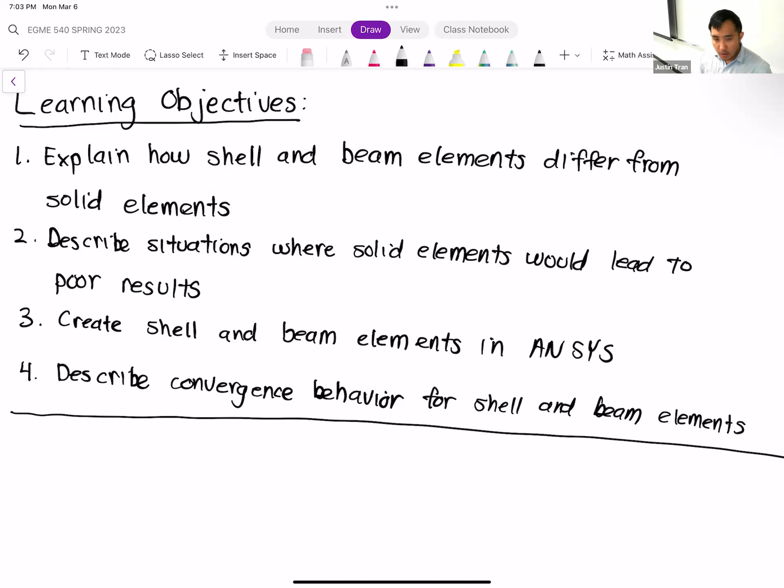Okay, let's go ahead and get started. The topic for today is shell and beam elements.

We started talking about this for the last 20 minutes of class last time, but let's go ahead and summarize what we talked about. So far, all the element types we've been using, the tetrahedrons and the hexahedrons, I consider these to be what's defined as the solid element types.

What the solid element types were really designed to do is simulate three-dimensional objects. Which sounds very obvious, right? Of course we're simulating 3D objects, so what's the big deal? Why are we introducing new elements if these already work for 3D objects?

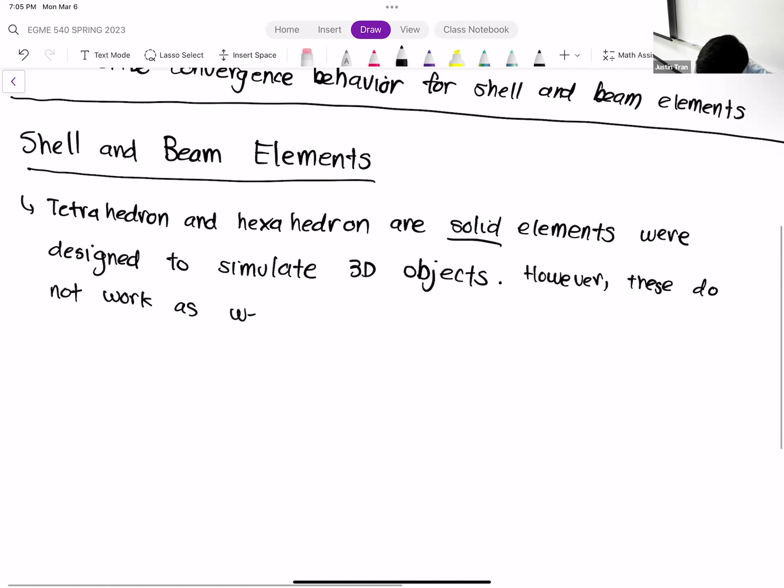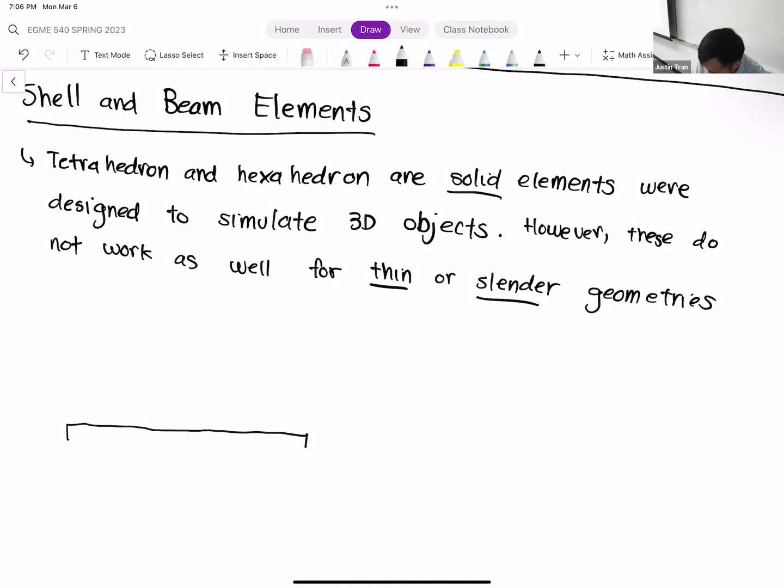So let's say, a thin geometry would look something like this, and the most quintessential example of that would be like a thin plate.

You can see from this image that if we look at 2 of the dimensions - the length of the plate, which we'll call L1, and the width of the plate, which we'll call L2 - and compare that to the thickness of the plate, L3, we have L1 about the same as L2, which is much, much greater than L3.

So we can look at this object and say yes, this is a three-dimensional object, but we have one dimension here that's much, much less than the other ones. Similarly, another common example you'll see is a slender rod.

In this situation we have one dimension, L1. And then I'm going to use two dimensions here - I know it's a cylindrical rod so technically you only need the diameter, but if we look at the length or size of the rod in each of those two directions, L2 and L3, we can use those as comparisons for their lengths.

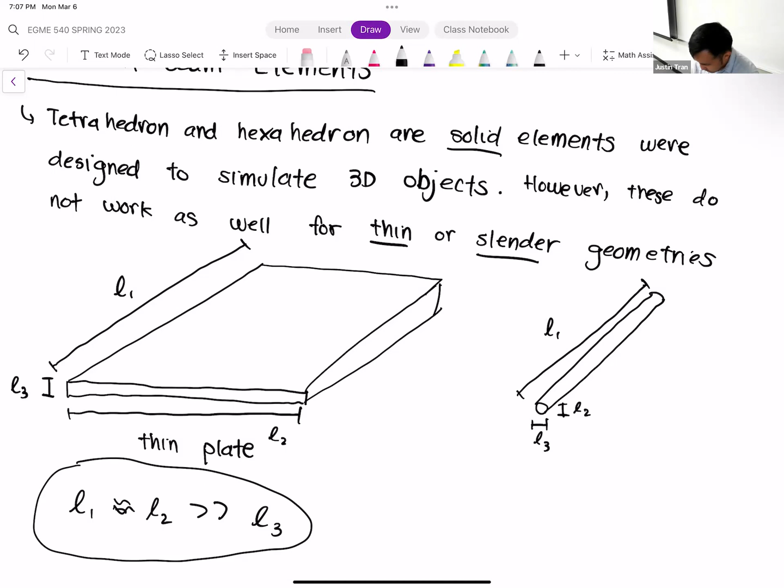So in this situation we have one dimension that's much, much bigger than the other. We have L1, which is much, much bigger than L2, which is about the same as L3.

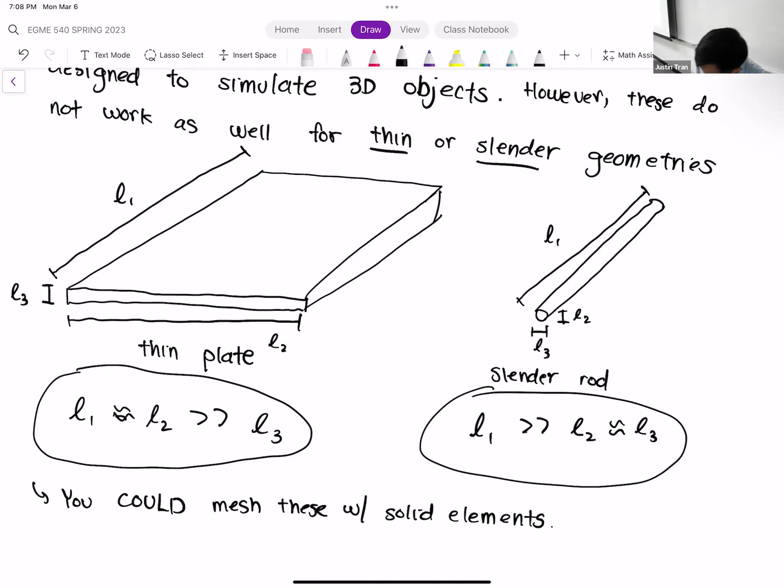Technically speaking, you could mesh these objects with a solid element type - you can use a tetrahedron or a hexahedron. You technically could, ANSYS is not going to stop you. The issue is that it's not going to be efficient, meaning that in order to get a good quality solution, you're going to have to use a lot of solid elements in this kind of small space.

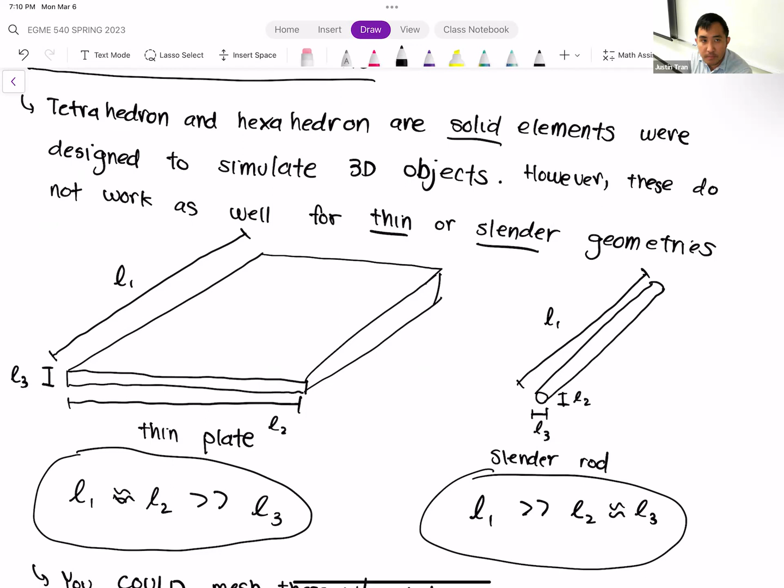So you're going to need - sorry, go ahead Ivan. Sorry for interrupting, you mentioned solid elements, can you briefly explain what you mean by that? Yeah, so solid elements are basically the tetrahedrons and the hexahedrons. I see, thank you, sir.

All right, so we'll dive a bit deeper in terms of why these elements, why the solid elements, are so inefficient. But let's take a step back first.

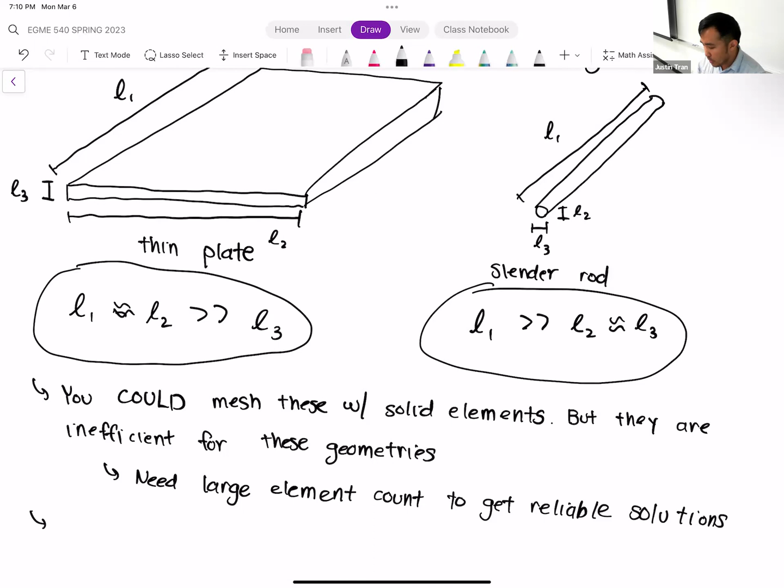The reason you can say the solid elements perform poorly here is that they're kind of ill-suited for these geometries. If you have a very thin plate, you have one dimension that's much, much smaller than the other ones, and same for a slender rod - you have one dimension that's much, much bigger than the others. So you have a mismatch of dimensions, and it would be great if you can use elements that capture that kind of behavior.

It would be great if our elements took advantage of these geometrical features.

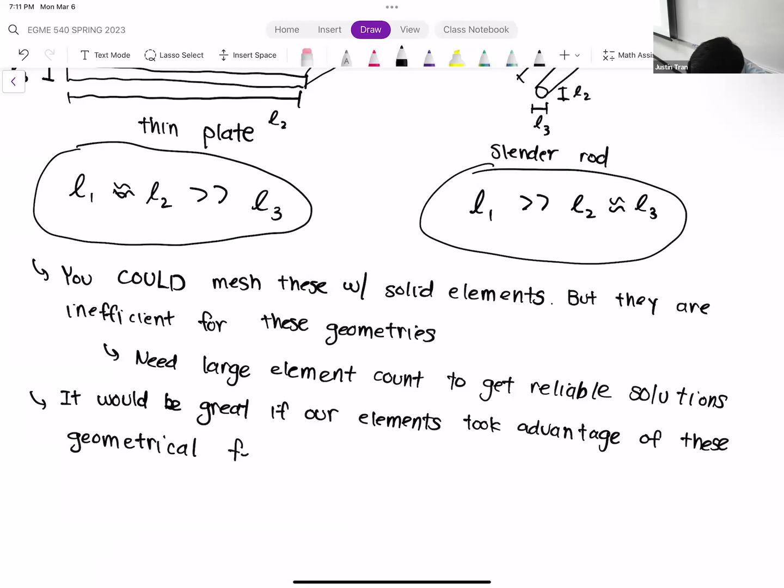And luckily such elements exist, okay? Otherwise I would not bring it up. And so these elements are shell and beam elements.

So today what we'll talk about is, first of all, we'll describe why solid elements are poor in these situations. Then we'll talk about what shell and beam elements do differently to make them work a lot more efficiently in these situations. Any questions on this so far?

Okay, so let's talk about why solid elements perform poorly in these situations. When you have a geometry with a very big disparity in the dimensions, what can happen sometimes is that you can have elements that are just one element through the thickness. That's typically how it's described.

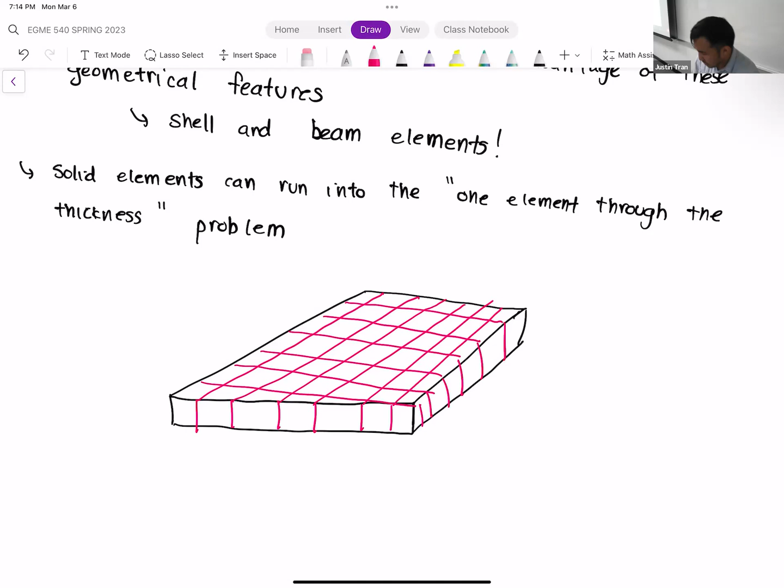When I say that we have this one element through the thickness problem, what I'm referring to is this. If we focus in on this element in particular right here, let's look at all the nodes of that element. All of the nodes on this element are facing the outside, right? So we have all exterior nodes.

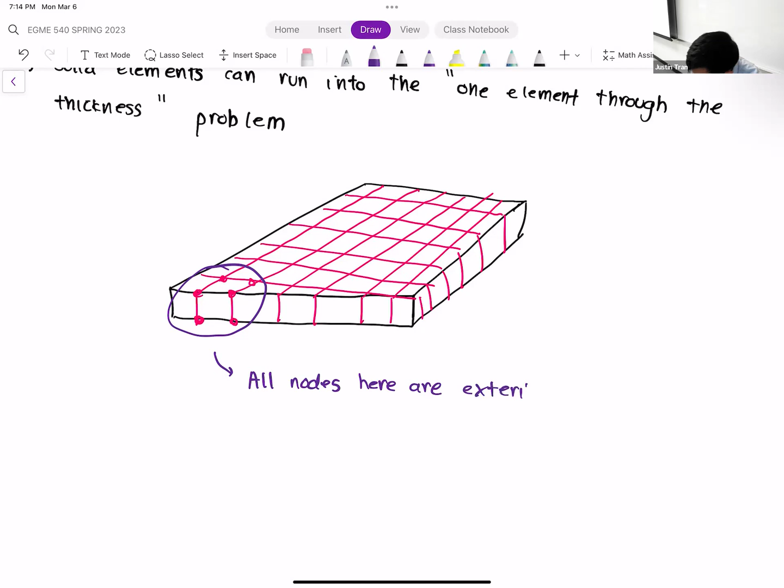That means that when you have an exterior node, their behavior or their solution values is primarily going to be determined by whichever boundary condition is being applied there.

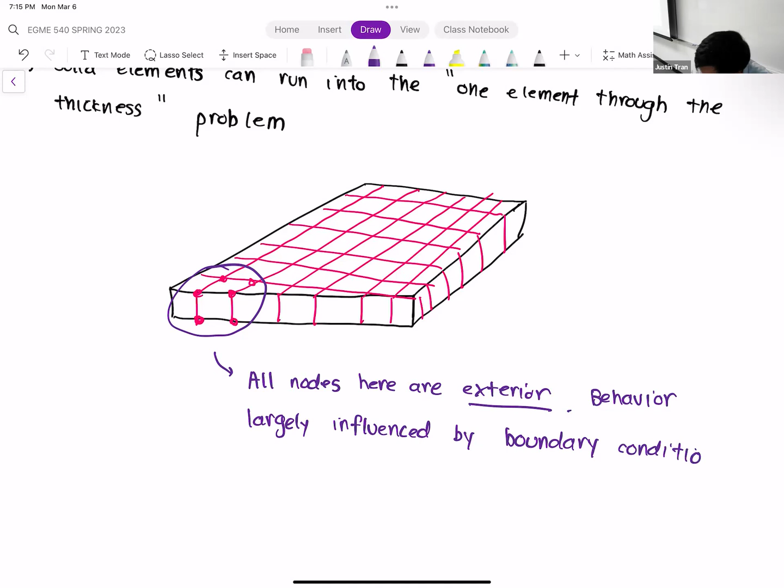Dr. Tran, what happens if there is no boundary condition applied? Will ANSYS give us an error, or will it assume the value of the nearest node?

No, we talked about that before when we talked about boundary conditions. So even if you don't explicitly put a boundary condition on a certain face, ANSYS does apply a default boundary condition there. A lot of times it's called the stress-free boundary condition, which means that there's no load being applied. Mathematically that may seem kind of obvious, but it does have a certain form within the code.

And so it's kind of important in these situations where that stress-free condition may not be what you want. You don't want it to have undue influence on you. Yeah, you need to have the right boundary conditions.

And not even the right boundary conditions - even if you had the perfect boundary conditions in this situation, if you had just one element through the thickness right here, it would not lead to... it'd still be wrong. I see, and that's what you're emphasizing here - the one element in the thickness direction causes errors.

Exactly. Because a lot of times, what we're interested in, especially when you do structural FEA - although the same thing applies if you're doing thermal FEA or fluids FEA - a lot of things that you're interested in are kind of internal quantities. For structural FEA, you're interested in the internal stresses.

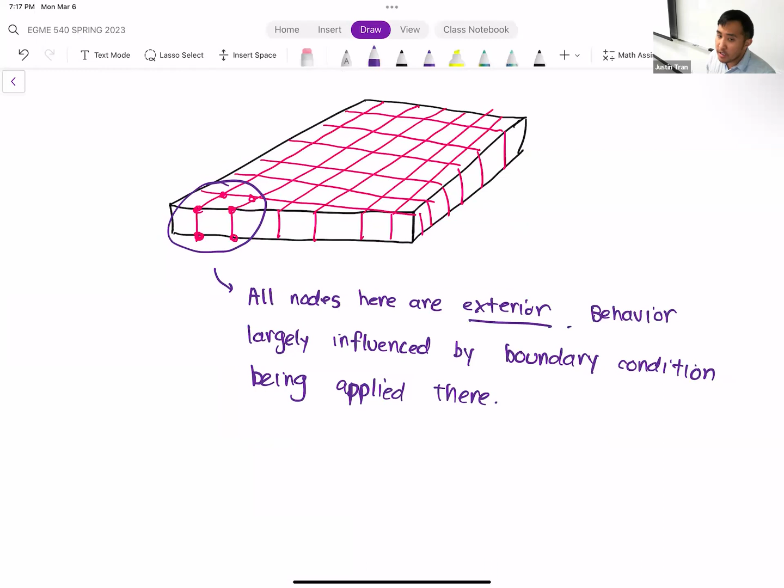So for fluids, you might be interested in like flow rate or the pressure. The thing is, when you're talking about these kind of derived quantities like stress or heat transfer, their value gets a lot less accurate if you don't have interior nodes. Sounds good, sir. Thank you.

And so a good mark of a healthy mesh is one that has a good amount of interior nodes at all points of the geometry. So that's one thing that people look for when they're looking at mesh.

So I was gonna ask, is there a certain minimum number of nodes, a general rule of thumb, like make your 3D dimensions a minimum of 5 nodes or something like that? Is there a general rule, or is it just up to the engineer?

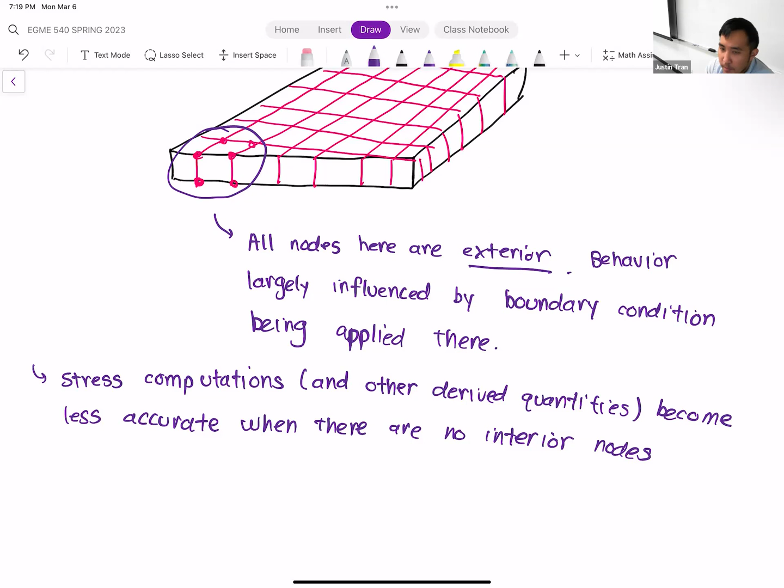There's no magic number. Generally, the more interior nodes you have, the better, because there can be a lot of derived quantities computed out there. Depending on how derived a quantity is, it's going to require more interior nodes. The bare minimum is at least one interior node, which is already much better than none. But the more you have, the more reliable your solution will be. Later in the class you'll learn about a mesh convergence test, where you see how the solution converges with the number of nodes or elements in your mesh. The more interior nodes you have, the easier it is to converge.

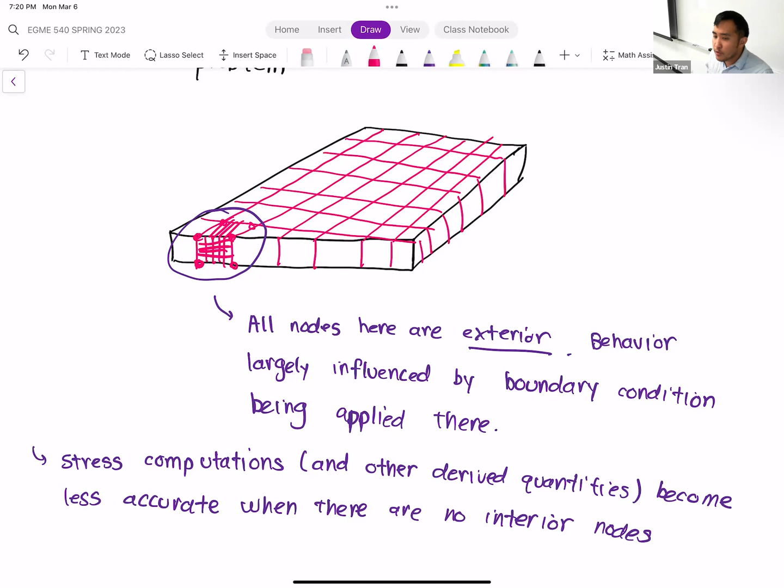So the problem is, one thing you may say is, okay, we want interior nodes, so why don't we just make the elements smaller until we get interior nodes? You can certainly make these elements much, much smaller, and solve your issue by adding more interior nodes. The problem is this is not practical in a lot of situations, because to get a decent amount of interior nodes in a very thin geometry, you'd need a very tiny element size, which drives up the cost of your simulation significantly. This shows you why solid elements may not be suitable for every geometry, especially ones like this.

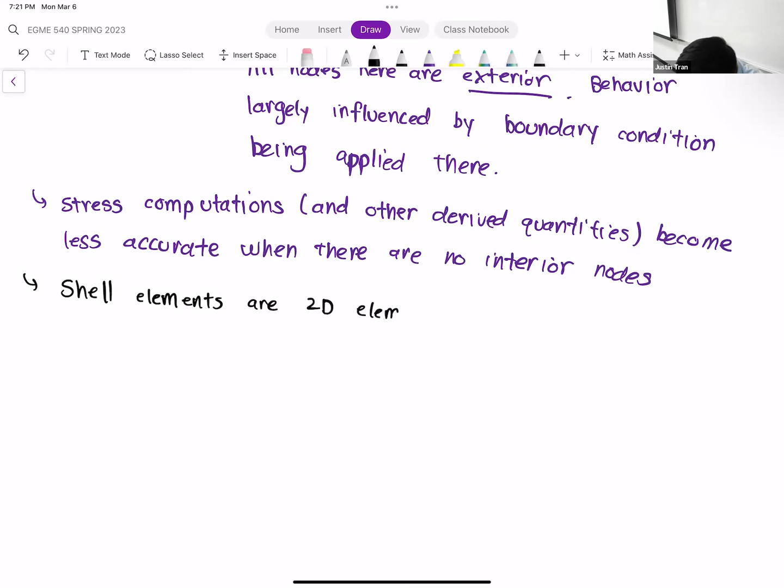That brings us to shell and beam elements. Let's talk about what they do differently. When you first look at them, they don't look like anything special. A shell element is basically just a two-dimensional element. We've gone over 2D elements, which are either triangles or quadrilaterals. Beam elements are just 1D elements. So what is a 1D element, you ask? A 1D element is just a line. You may be thinking, wait a minute, that doesn't sound special, that just sounds like a 2D or 1D simulation. But what makes these special, and the reason we give them a special name, is that they've been augmented with additional terms, and designed to work in 3 dimensions.

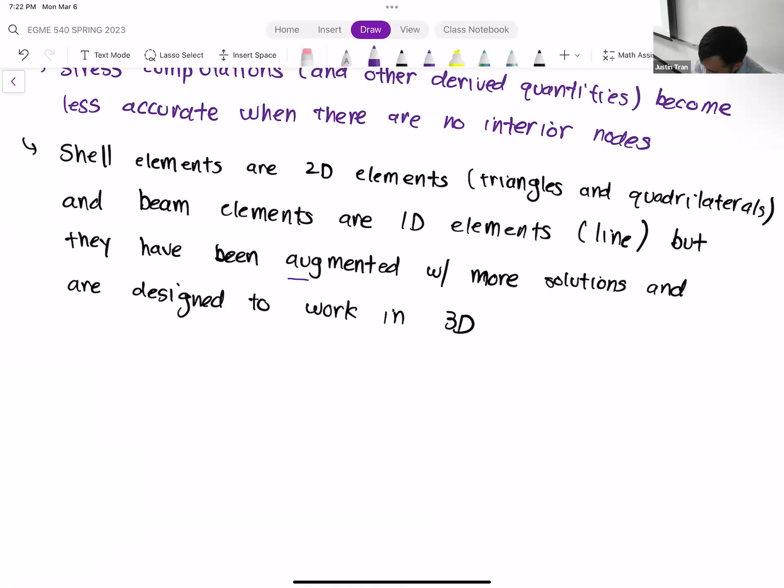Let's go over both of these statements. First, let's talk about the augmentation. Normally, when you have just a regular solid element type, the finite element solution is going to solve what I consider the primary solution values. But when you have a shell and beam element, FEA is actually going to solve for more terms, or more solutions, at your nodes.

So to illustrate this, for solid elements, the first thing that FEA solves are all 3 dimensions of deformation, in X, Y, and Z. Then, from the deformation, the FEA computes things like stress, which are derived from the deformation. That's why we call it a derived quantity.

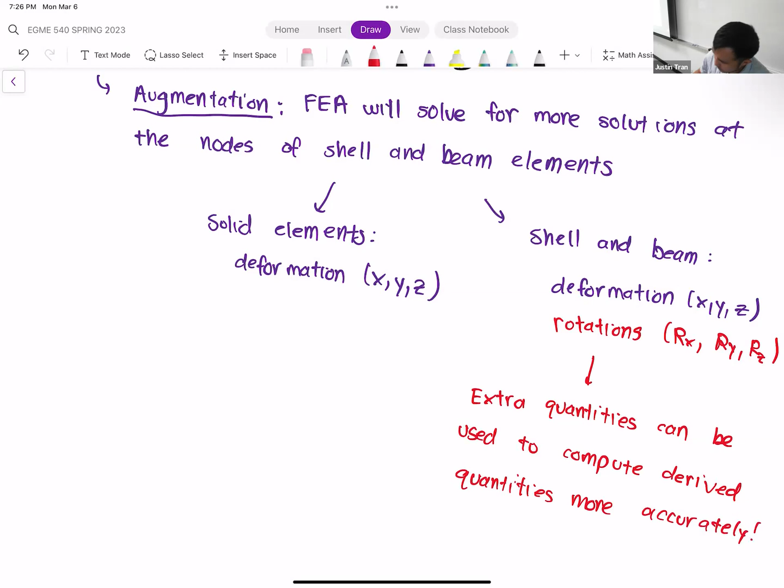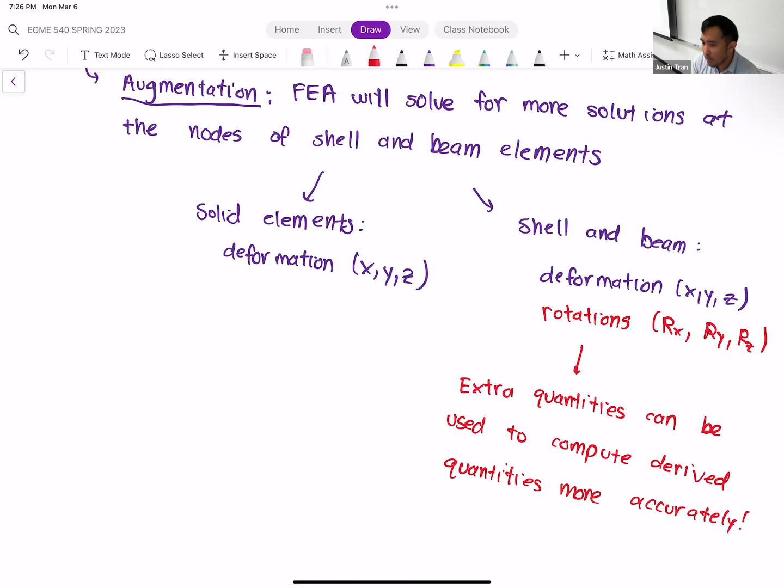Even though visually what you'll see is that when you use a shell element, it'll look like just a thin sheet, okay, something with zero thickness. So you might be saying, wait a minute, you just told me that if you have no interior nodes, that's bad. And if you have a 2D shell, you literally have zero interior nodes. So how could that be better? The reason it's better is because the shell, we compute these extra things, and those extra things can compute things like stresses a lot more accurately.

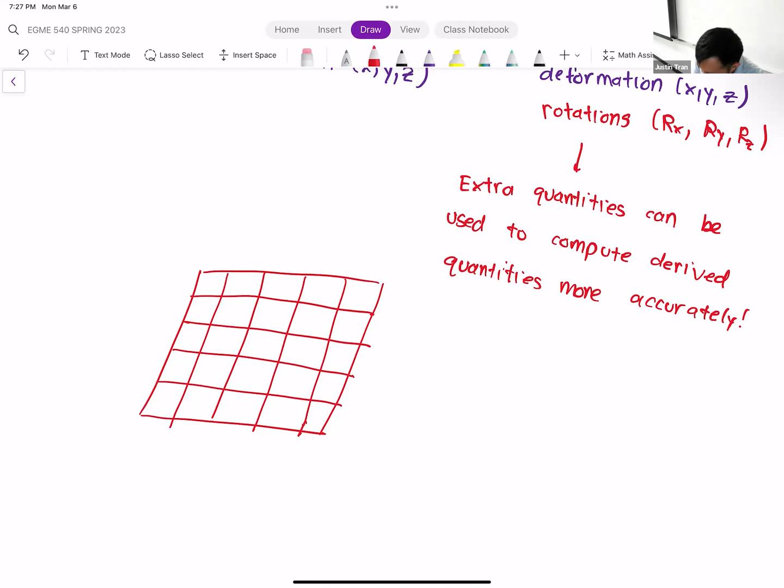And visually it looks something like this. Let's take the same plate, but instead mesh it with shell elements. So a shell representation of that thin sheet from before would look like this, okay? But at each of the nodes, we're computing dx, dy, dz - those would be the deformations - and rx, ry, and rz. In other words, we have more degrees of freedom to play with and more degrees of freedom to solve, and that gives us more accurate results for all the other derived quantities.

We're not going to get into the mathematics behind it. The reason why we have this augmentation is that for the shell elements, we're essentially solving a different equation. And because we're solving that different equation, we're able to obtain these extra results.

All right, any questions on this? Yeah. Wait a second, rotation? Yeah.

What is it? So rotation is basically a change in the orientation, or it computes the change. So let's say you have kind of a square like this. At each of these nodes, you can compute its displacement. Displacement is simply just where the node started and where it's completed. But then the orientation will also tell you how the geometry actually rotates at that node as well. So it's not just the displacement, but a change in its shape. You kind of think about that. Yeah, mm-hmm.

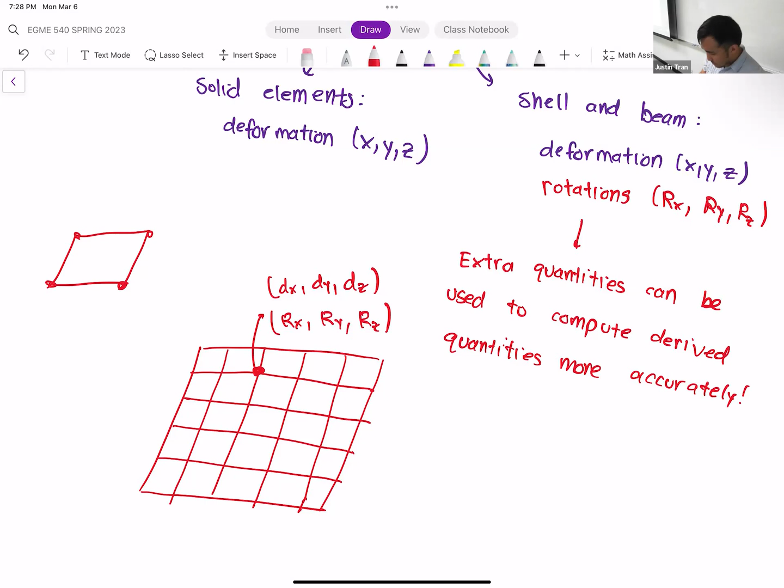Any other questions on this stuff here? Okay. And so the other thing that makes shell and beam elements special is that they're designed to work in 3D.

What I mean by that is that normally if you have a 2D simulation, you're only going to compute quantities of interest, or you're only going to have degrees of freedom within that 2D plane. For shell and beam elements, we actually compute displacements - we call it out of plane.

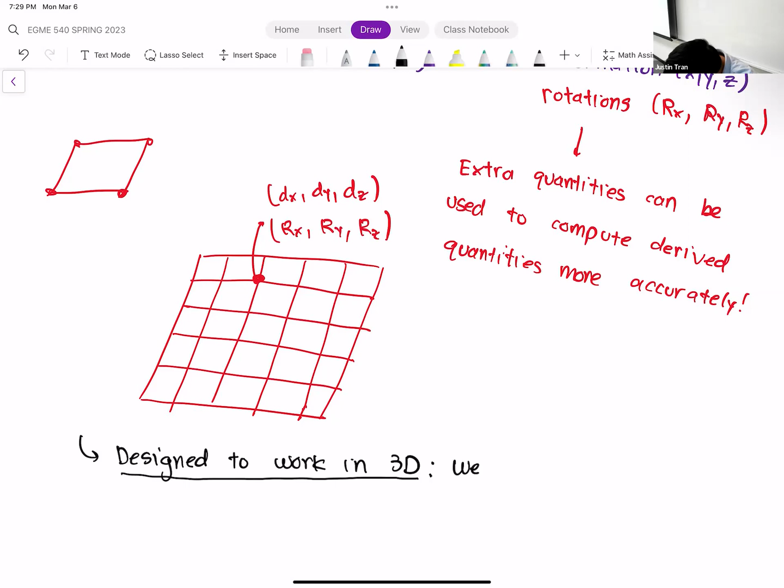I've already kind of shown it in the red figure above. Normally if you just have a 2D sheet - think back to activity 1, that was a pure 2D simulation. We did not use shell elements for that, even though we did use 2D elements. The difference there is that in activity 1, when we computed the deformations, they were only in the X and Y direction because we were constrained within that plane of motion.

But for shell elements, we could actually compute displacements that go out of plane. And that's really key, and that's why we can actually use them together in a 3D situation, because we can actually compute those quantities. So that's kind of what makes shells and beams different - it's not just a 2D simulation. It's really kind of these special element types that have their own governing equation that just make them work a lot more efficiently for some geometries.

Okay, any questions on this? Okay. So you might be asking, when is it appropriate, or when do we actually use shell and beam elements?

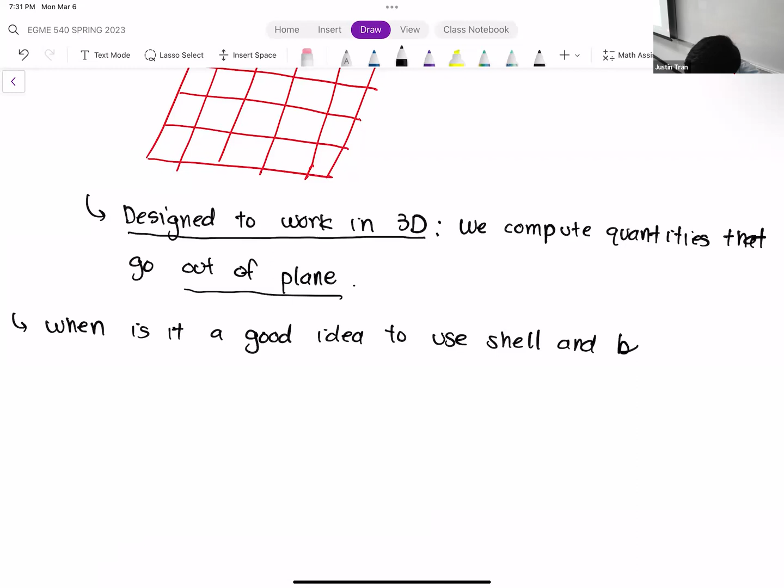There's no hard rule of thumb on this, so there's no threshold that you have to cross. But I do have my own personal preferences, and let me preface this by saying that this is kind of what I feel for this - but other people have other opinions. Generally what I like to do is I like to look at the dimensions of the geometry in question, and I like to see how mismatched they are.

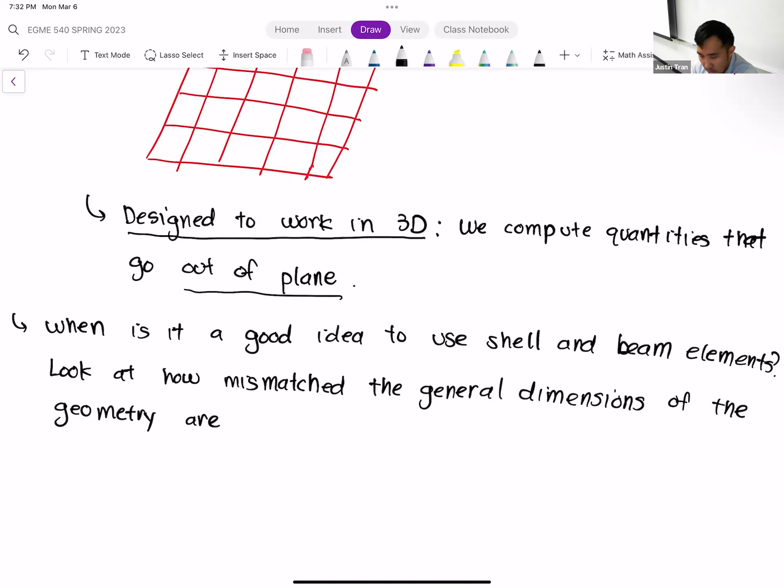When you say mismatch, are you implying the differences in the degrees of freedom? No, mismatch, what I mean by that is just how different those dimensions are. So you'll see in a second. Yeah, sounds good.

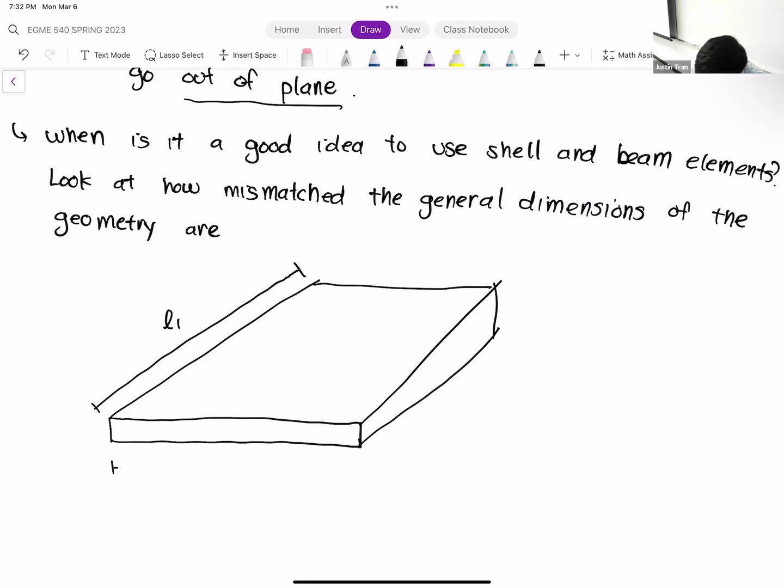Okay, let's look at our thin plate. For thin geometries, we have the distinction where one dimension is much smaller than the others. Using the same convention as before, let's call this L1, L2, and L3.

By mismatch, I basically mean the ratio of the largest dimension compared to the smallest dimension, or even the second largest to the smallest. You can choose one of those ratios. Let's say I take the ratio of L1 over L3, where L1 is the largest dimension and L3 is the smallest one.

What I like to do is check if this ratio is about equal to 10, so you have a dimension that's about 10 times bigger in one direction than the other. That's usually a good sign or indication that shell elements would be good.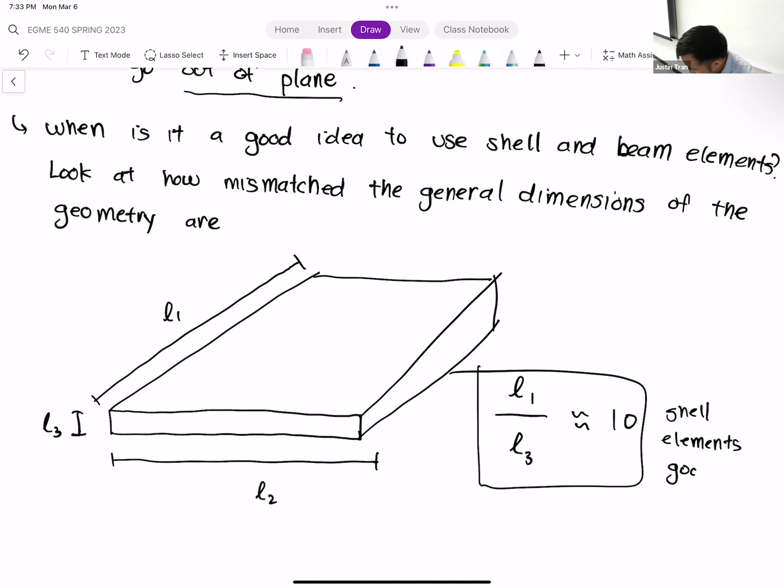Same thing for slender elements. For slender geometries, we have one dimension that's much bigger than the others. We take the ratio L1 over L2 or L1 over L3. If this is about 10, that's when I usually start to consider shells and beams. Basically an order of magnitude difference in the dimensions.

Of course, when you're doing complex geometries, it's not going to work out this nicely. You're not going to have a clean measurement for the dimension in each direction. It works well here because it's literally just a square and a cylinder. But it's going to be your judgment call.

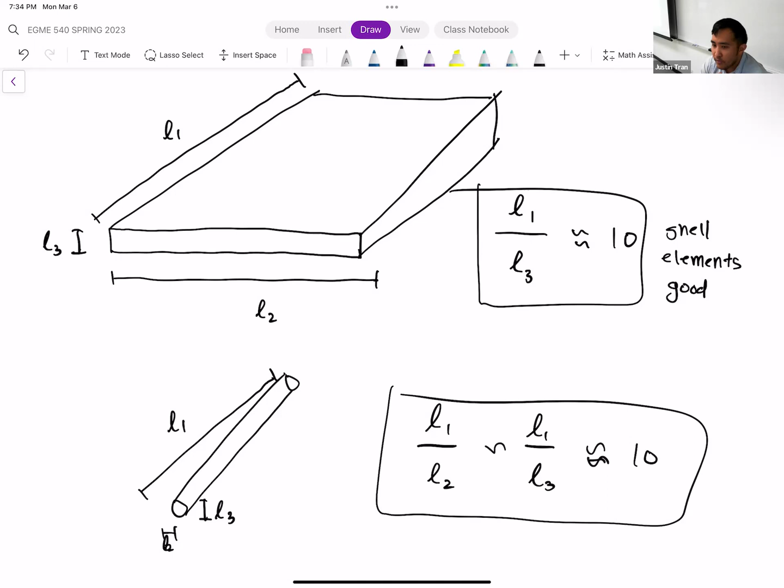I would say the ultimate test you can use to determine if shells or beams are good is to first just try meshing it with solid elements. Tinker around with the mesh settings. If you're getting a situation where you have more than one element through the thickness, that's usually the best way to know.

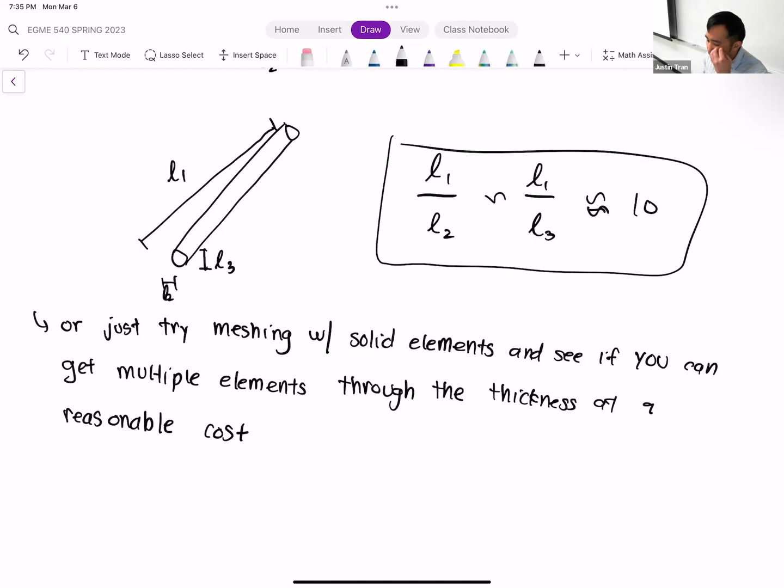Of course, the caveat here is that at a reasonable cost, you don't want to drive up your computational budget significantly just for one part of the geometry. So just kind of weigh the pros and cons. Any questions on this?

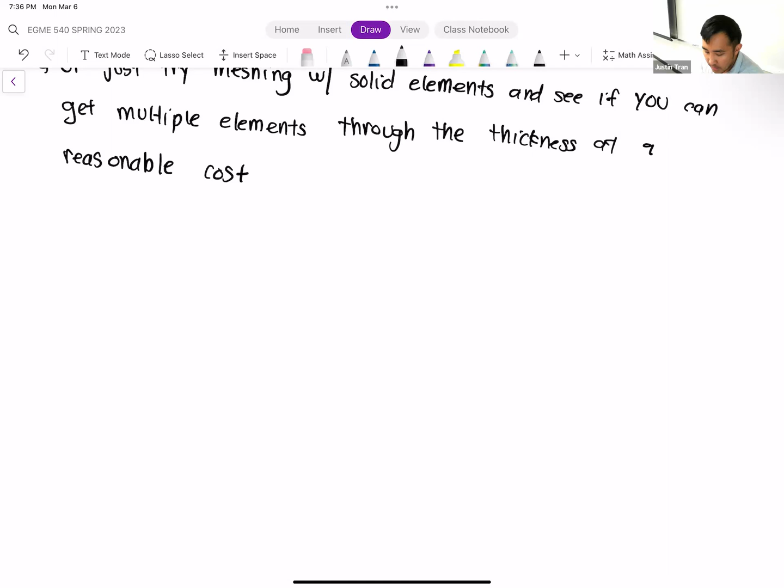Okay, so now let's start talking about how we actually create shell and beam elements. The good thing about ANSYS is that it has quite a few robust tools for producing shell and beam elements. We're going to be covering a lot of that on Wednesday, demonstrating it. But let's talk about what's actually happening underneath the hood.

Let's start with shells. Just like we've been talking about, a shell is basically a 2D element. It's an element with infinitesimally small thickness, or almost negligible thickness. Their main purpose or main use case is to represent geometries that are very thin.

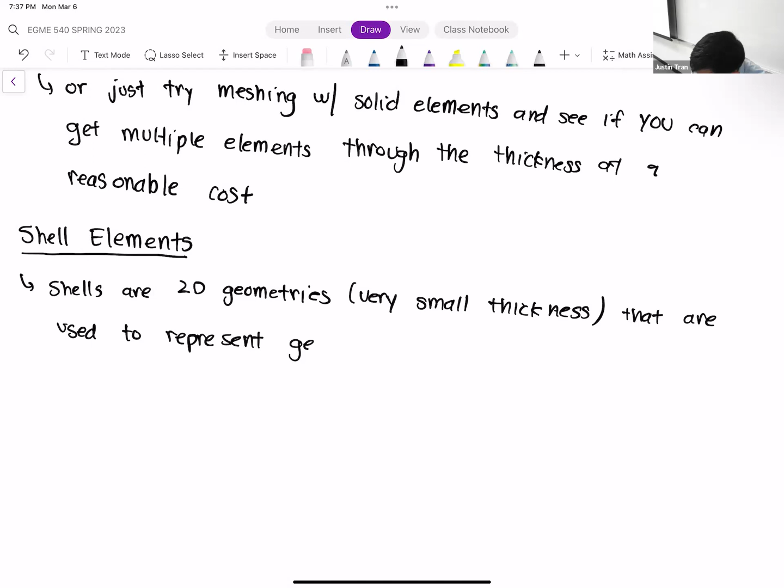So visually, when you look at a shell element, it's going to look like a thin piece of paper, like it has no thickness at all. It does have a thickness, it's just represented in a different way. When you have a shell element, the thickness is stored more as a material property rather than a geometric property.

Very similar to things like Young's modulus or the density, those are properties of the material, and every element knows what its Young's modulus is. When you have a shell element, there's just an additional property that gets added to it, which is the thickness. And it looks kind of like this.

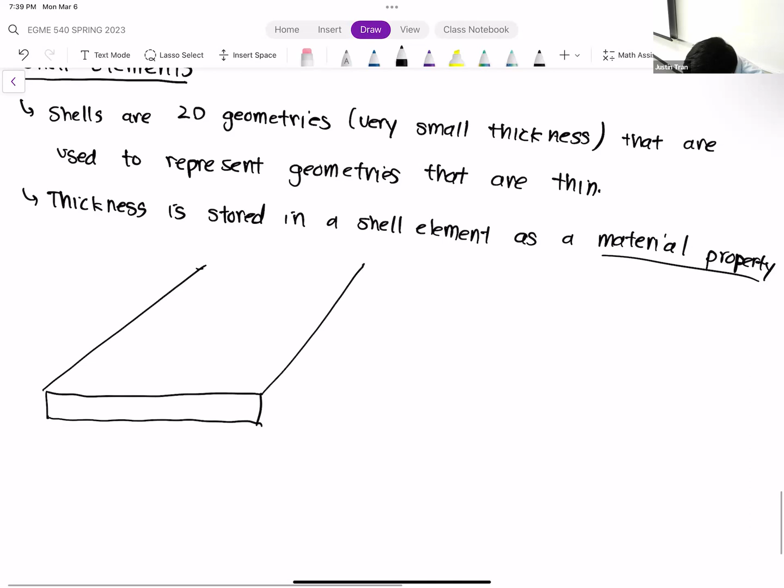Let me go back to our thin plate example. The thickness of this plate, just to be consistent, is L3. What we'll see is that to create a shell element, most of the time you're going to be basically modifying a three-dimensional CAD and then transforming parts of that geometry into a shell. When you turn this to a shell, it's going to look something like this.

Visually, it's going to look like a piece of paper, but in reality, all the elements on the shell have an additional property called thickness, and it's going to be equal to L3. So the thickness information is not lost. Even though visually you don't see the thickness, it's still there, just represented as a material property.

Like I mentioned before, when you have shell elements, you're essentially solving a different governing equation. The equation is modified so you can incorporate the thickness as a variable like this, not something that's represented geometrically.

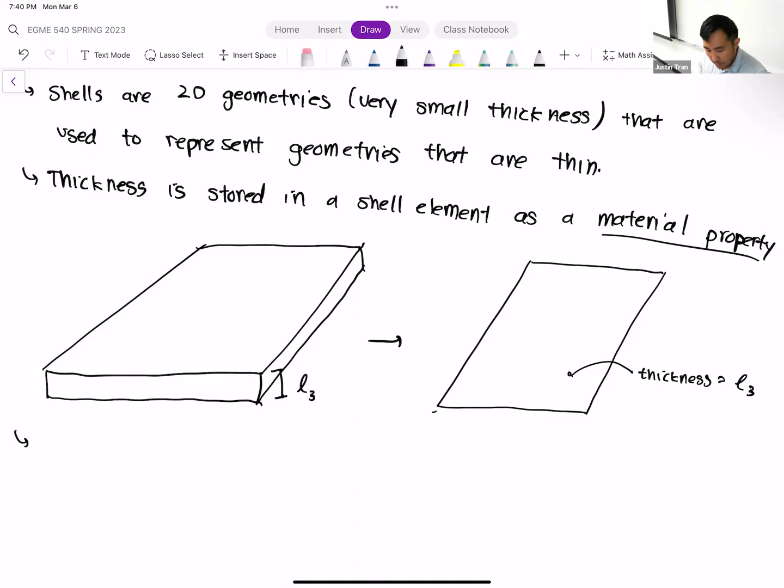In general, there are four different ways to create shells for FEA. Some are more commonly used than others, but we'll talk about that. The first way is to just create a 2D sketch and assign it to be a shell.

Number 2 is to create an open sketch. An open sketch is one that does not close on itself. Then we can use additional CAD tools like extrusion, revolve, or sweep to generate planar surfaces.

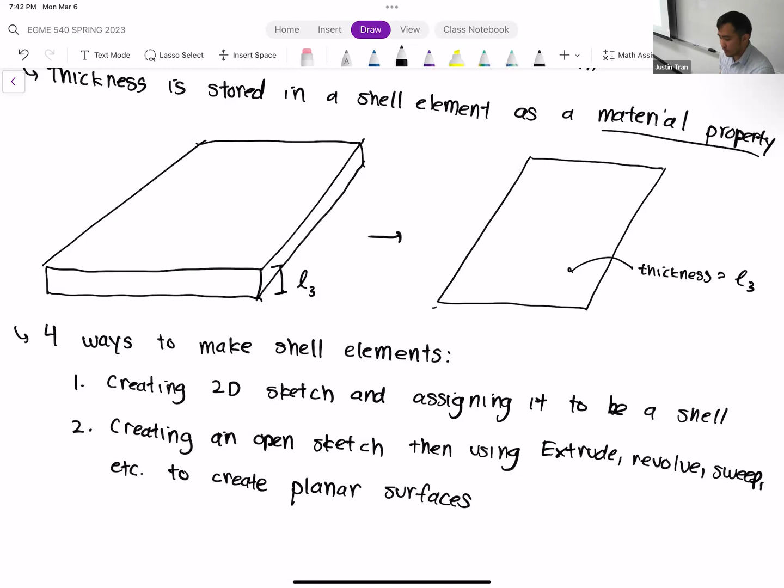Method 1 and method 2 I'd say are less common, because in order to use them you kind of have to design your part, or CAD up your part from the very beginning with the intention of making certain parts shells. Honestly, if you can do that, that's the cleanest way, but it's just not that common. A lot of times when running FEA, someone else is creating the CAD model for you, and they're not going to make your life convenient, because that's just not how life works in general.

A lot of times you'll receive a CAD model that's fully designed in 3D, and you'll modify it to have shells or beams as you see fit. Method 3 is the one we'll use most often, and we'll make use of it a lot in the activity on Wednesday. Method 3 is to use something called a mid-surface tool.

The way the mid-surface tool works is that you select two surfaces or two faces that are parallel to each other and very close to each other, and then it creates a shell kind of in between.

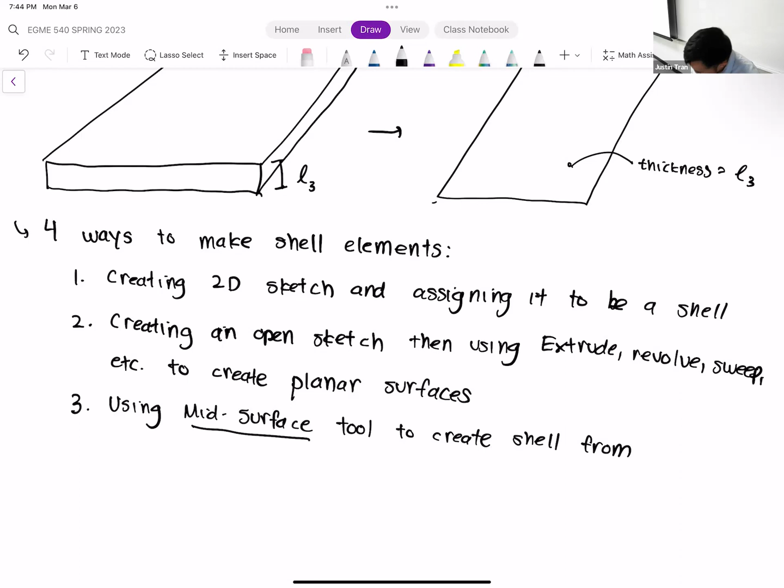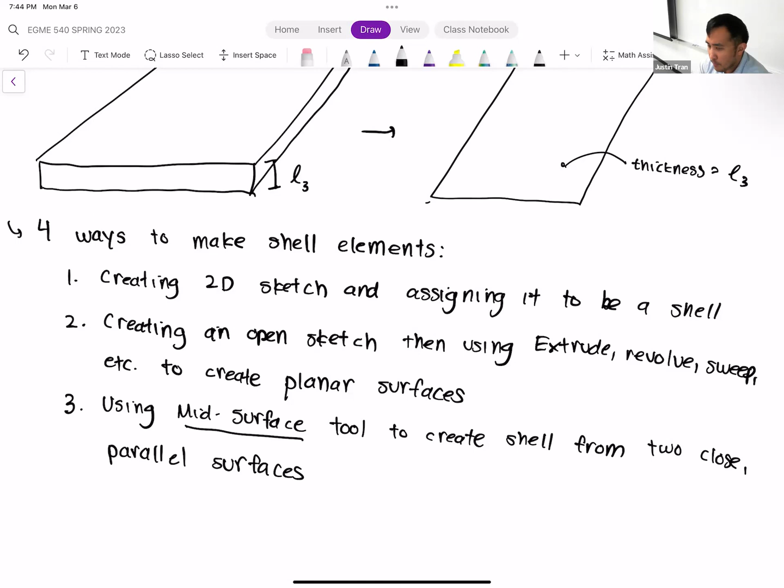Professor, will you be showing us how to do this in the actual simulation? Oh, of course, we're going to walk through it together on Wednesday. There's going to be a lot going on Wednesday, so I want to prep you and show you what we're going to be doing, but I'll be walking you through it every step of the way. Thank you.

Method 3 is the most common, and it's the one we'll be using almost exclusively on Wednesday. But there's a fourth tool within ANSYS itself, called the thin surface tool. The way this works is that you basically select a solid object, and the thin surface tool will create a shell from that, hollowing it out.

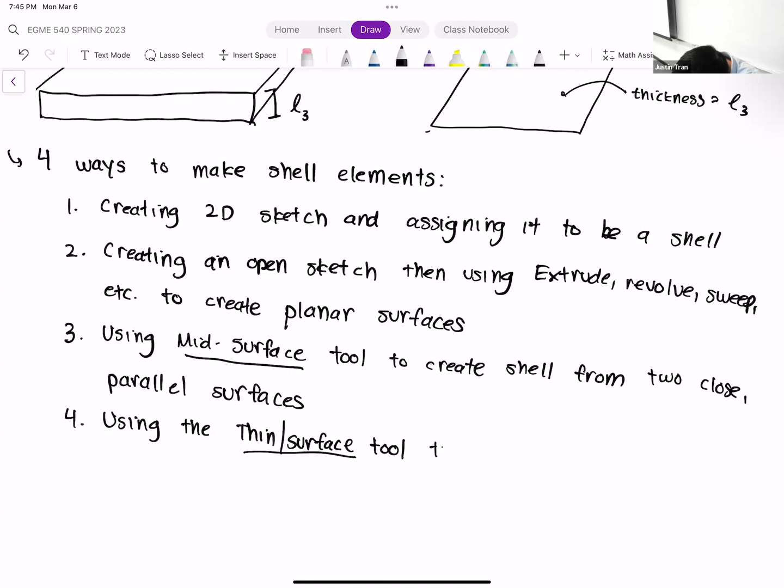In the interest of time, I want to make sure I get to the end of the lecture notes today. I'm just going to talk about mid-surfacing, since that's the main one we'll use on Wednesday. I want to show you how it works visually, and we can discuss the other three methods more if we have time at the end. So let's talk about mid-surfacing.

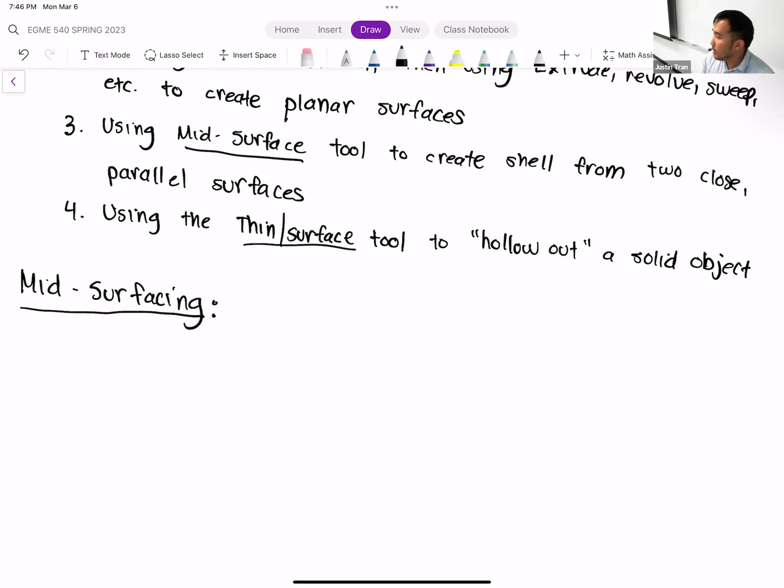The idea behind mid-surfacing is that if you have two surfaces that are parallel and very close to each other, that probably means that's a thin part of your geometry.

And so what the mid surface essentially does is that it takes those two thin parallel surfaces and just kind of eliminates the thickness between them.

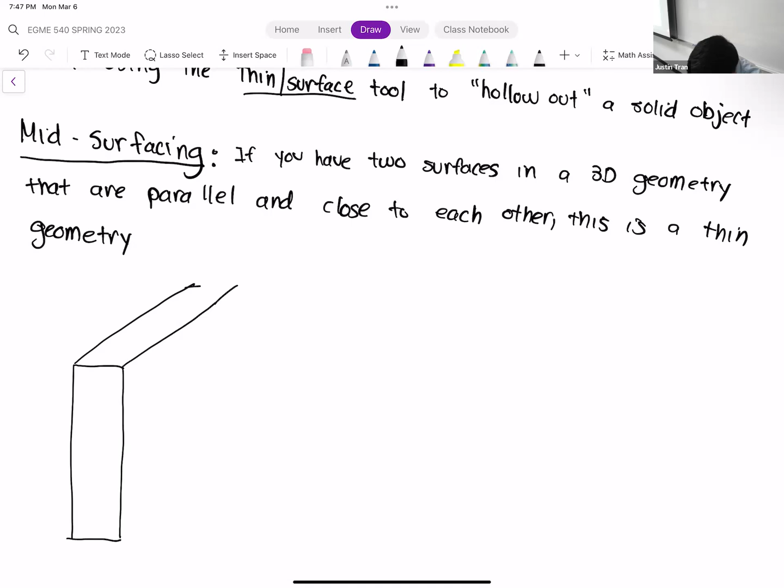All right, so just as an example, let's see. The way it works is that if you have a situation, let's say you have a geometry that looks like this. On the one hand, you have this surface on this side, we'll call this surface 1. And then behind the surface, we have another one that's exactly parallel to it. It's a little bit hard to draw, but it's basically the surface that's outlined here.

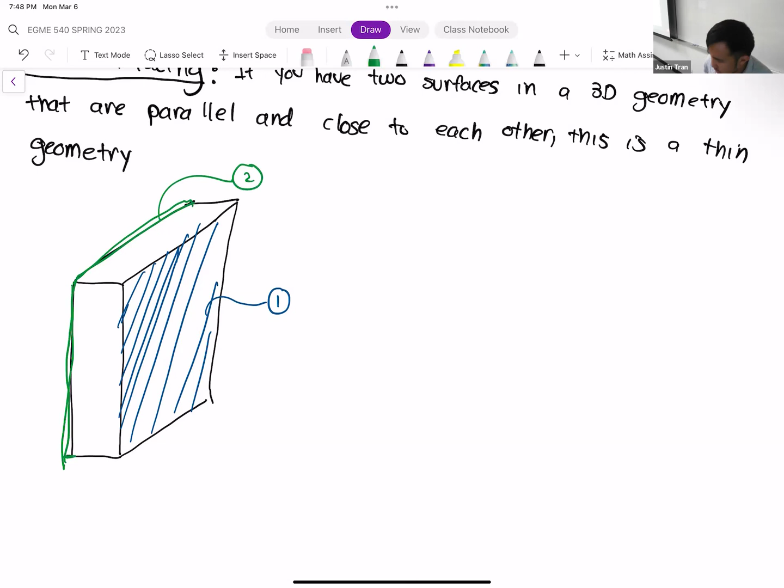So we'll call this surface 2. And so the way this tool works is that in ANSYS, what you're going to do is click both surfaces.

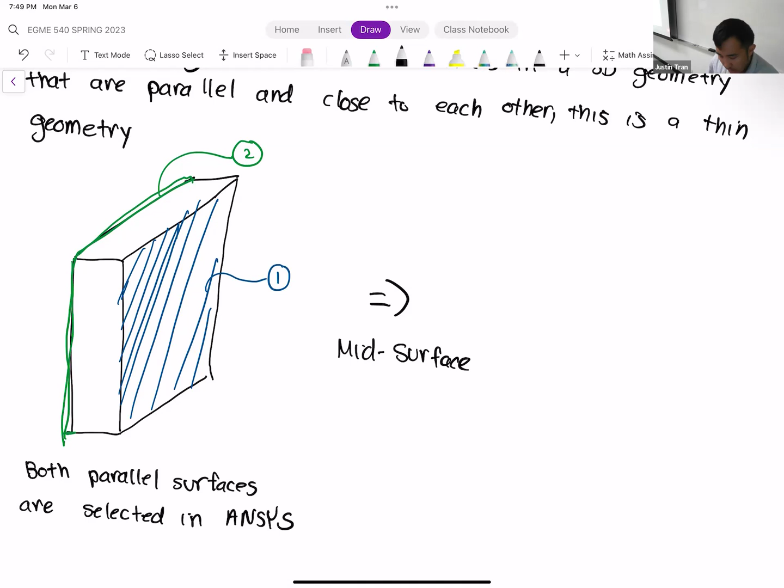And once those two surfaces are selected, then you tell ANSYS that I want to do a mid surface here. And then what's going to happen is that one shell is going to be placed right in the middle of these two parallel surfaces. And so the result of this is, use pink.

And so this pink shell, this is now a shell, and so that thickness is eliminated. So now this shell here kind of represents that geometry, where previously you actually had something with thickness.

So previously you had something like this, so let me go ahead and draw it in dotted lines. The dotted lines represent what the geometry was before the mid surface, and the mid surface basically eliminated that thickness and then replaced it with a shell.

This works really great, and a lot of geometries kind of follow this pattern, so you can use this for all those cases. Once again, I'll walk you through this on Wednesday, so I'm not just going to throw you to the wolves, but I just want to show you what's going on there.

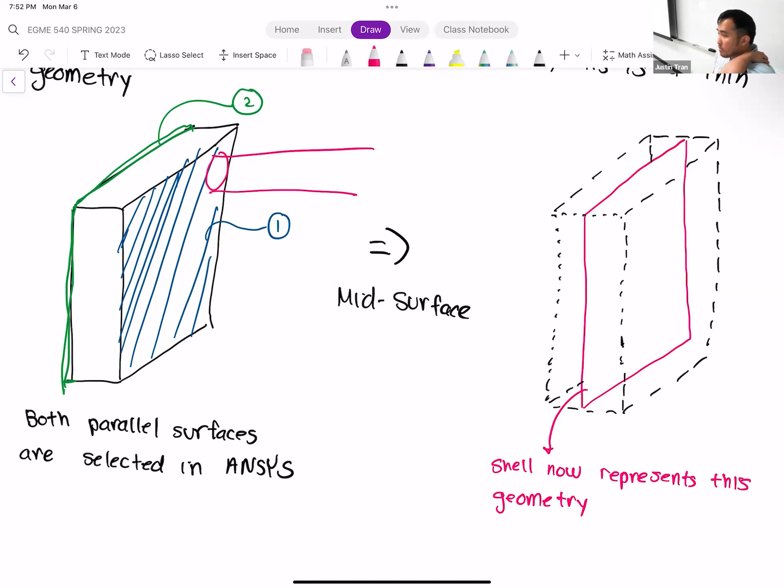If you have a fairly thick part, it's better to use solid elements for that, because the shell is not going to capture that as well. Any other questions on this? Okay, all right, so let's go ahead and move on to beam elements.

A beam element is a 1D element that's meant to represent a slender geometry. Remember, we defined a slender geometry to be something where one dimension is significantly bigger than the other two. So when you have one dimension that's significantly bigger, the other two are considered insignificant, and that's why we represent that with the 1D element.

Very similar to the shell element, it stores some additional properties. If you think of the shell element, the thickness is something that's stored as a material property. For beams, it's actually a little bit more unique, they have to store more complex information than just the thickness. Beam elements have to remember what its cross-sectional area was and what its cross-sectional shape was before turning into a beam.

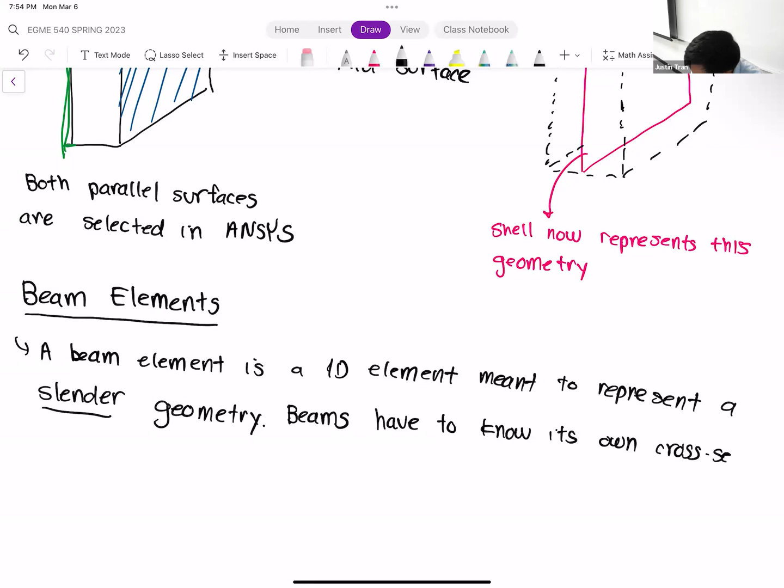So for example, if we go to our quintessential example of a beam element. Let's say we have a cylindrical rod. And so when we turn this into a beam, it literally just becomes a line.

So you may think that's pretty straightforward, right? We have a cylinder that turns into a line. Let me give you another example. Instead of a cylindrical beam, let me draw an I-beam.

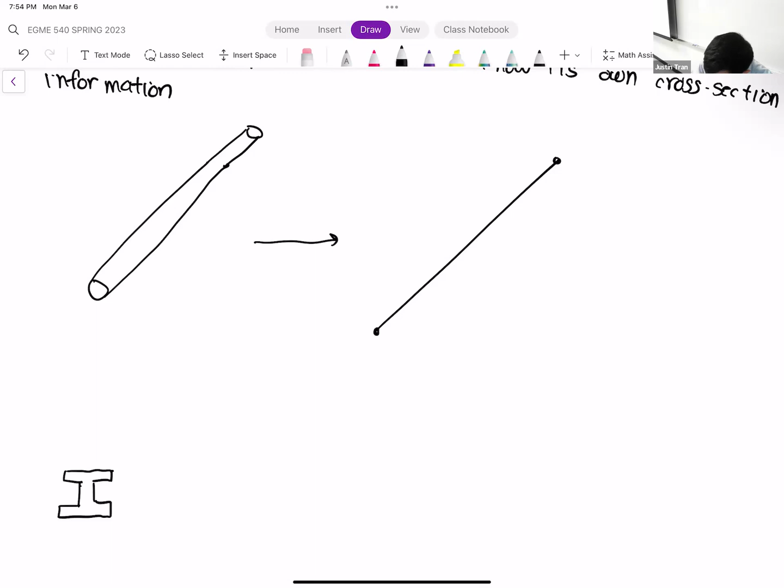Why did I draw an I-beam? God, had too many near-death experiences this weekend to draw that accurate, but you get it. It's an I-beam, all right? So it has an I cross-section.

Okay, and so when you turn this into a beam, it's going to look exactly the same as above, like a line. Should have done a square, way easier to draw. Anyway, okay.

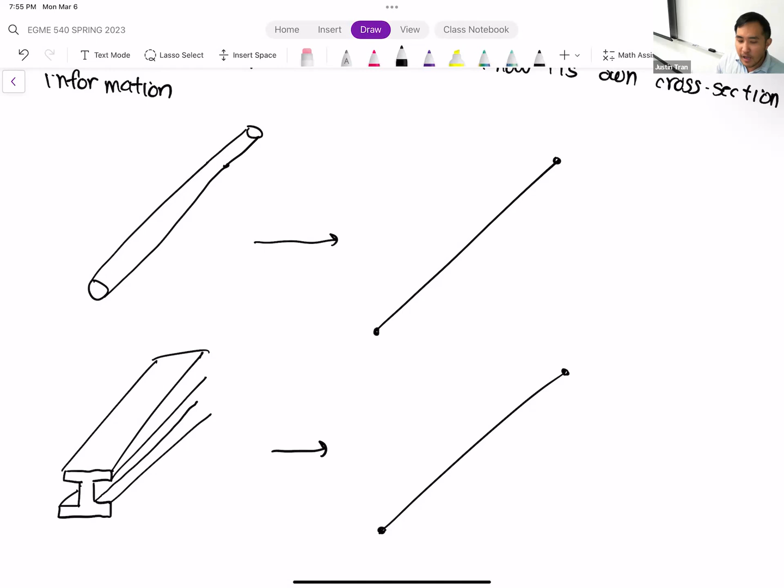So visually, these two, the top and bottom, when you turn them into beams, look the same. But obviously these two beams are different, right? The top beam has a circular cross-section, the bottom beam has an I cross-section. And so in order to differentiate this, the beam must store its cross-sectional information, and that includes its shape but also its dimensions as well.

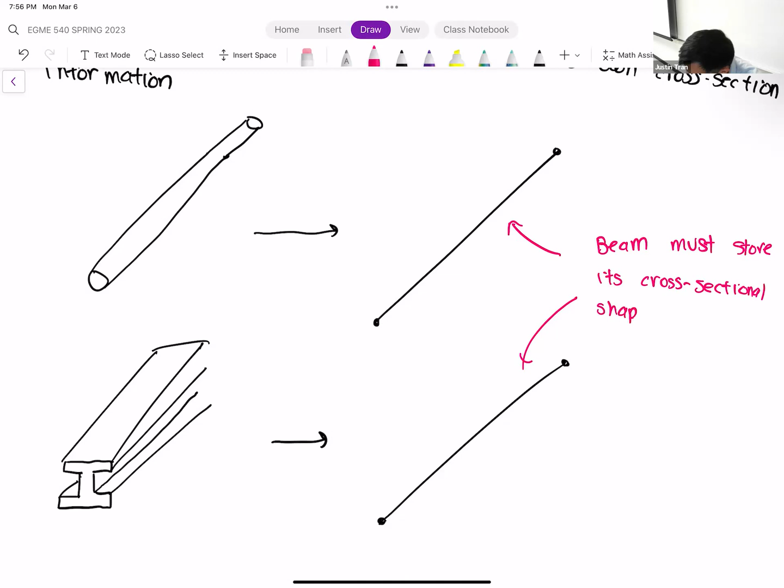The way it does this is that it basically stores it as a sketch. So inside each beam is basically a sketch of what its cross-section looks like with its dimensions. Normally the cross-section information is quite a bit more complicated than the thickness, so normally it's not something you have to think about unless you're making a beam from scratch. But I do want you to know that information is not lost, it's still there, and it still does make an impact based on the equations.

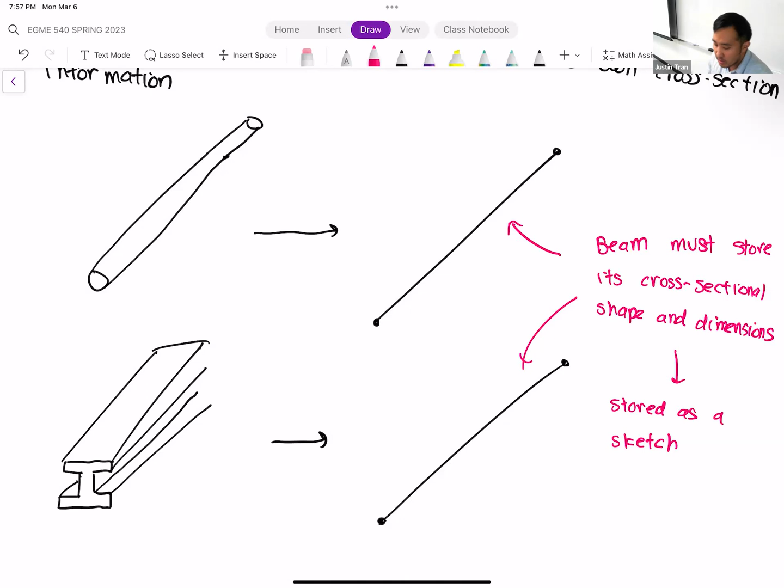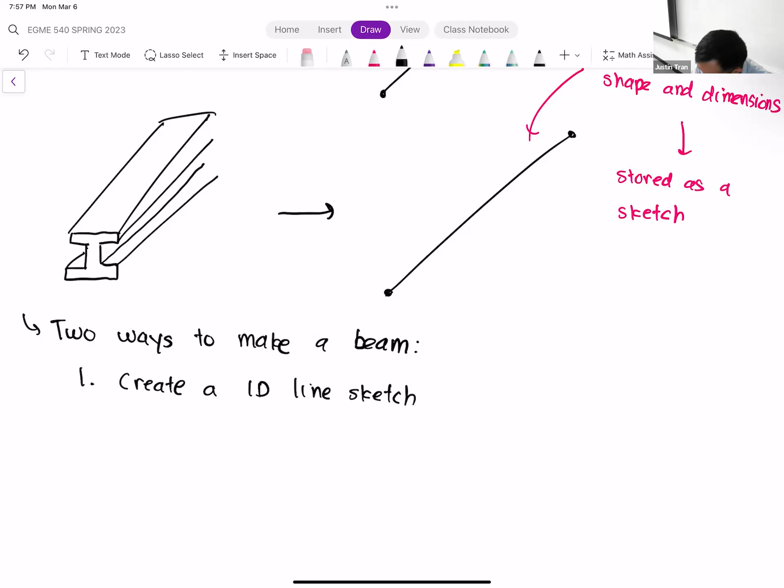All right, so there are two ways to make a beam, and these two methods follow kind of the same spirit as the shell. There's method one, where if you're creating the CAD model from scratch for the explicit purpose of FEA, this would be the better method. So method one would be to create a 1D line sketch and then assign that to be a beam. That's the cleaner way to do it, you're going to end up with much cleaner geometry as a result. But in reality, that doesn't happen all that often because you're usually not the one creating the CAD.

And so the second way is to use a tool called extraction. By extraction, all you have to do is click a slender part of your geometry, and then ANSYS immediately turns that into a beam. The nice thing about method two is that it preserves the cross-section information, so it kind of stores that automatically for you. Method two is what we're going to be using in the activity. It's actually quite convenient to use the extraction - you just turn the tool on and point and click at the different places. Okay, any questions on this?

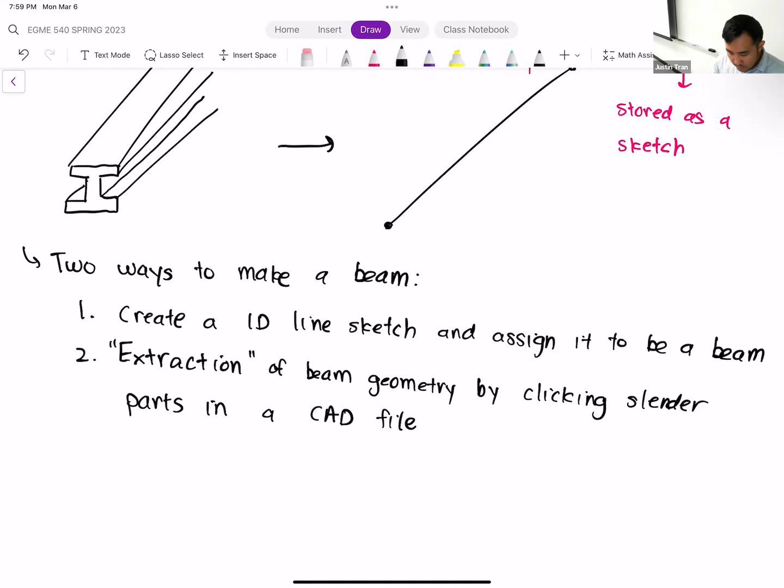All right, so that's all I wanted to talk about with regards to the properties of shells and beams. The last thing I want to get to today is to talk about accuracy and convergence of shell and beam elements.

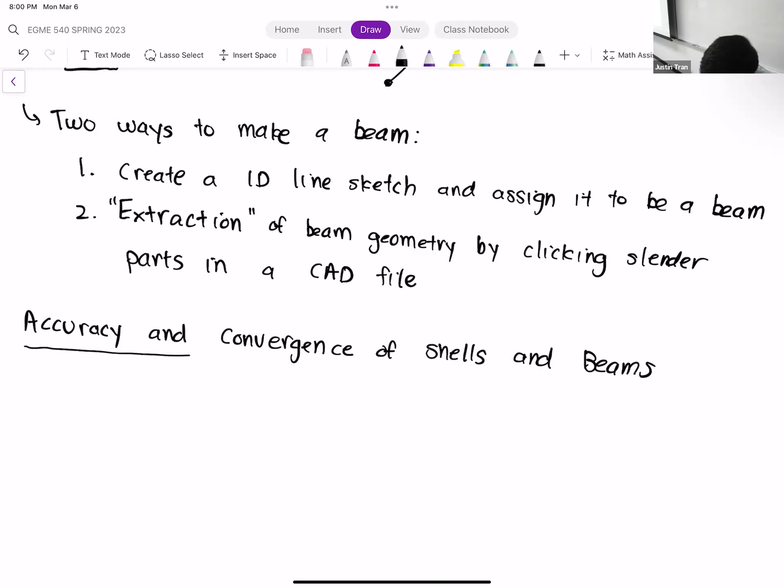So when we talk about accuracy in an FEA simulation, accuracy refers to how realistic, how accurate, or how well your simulation predicts reality. The more accurate your simulation is, the better representation of reality it is. And we've already discussed the fact that generally the smaller your element size, the more accurate your simulation is going to be.

That's undeniable, so that's one of the universal truths of FEA. In a perfect world where we have limitless resources, shells and beams would be a non-issue because all you would do is create your geometry and mesh the hell out of it - create meshes with millions, billions of elements, get the most accurate thing in the world, and it'll be beautiful. In reality, we don't have that kind of luxury, we're limited by resources. So not only is it important to know that more elements give you an accurate result, what's more important is how efficiently can you get to that accurate result in the least amount of elements.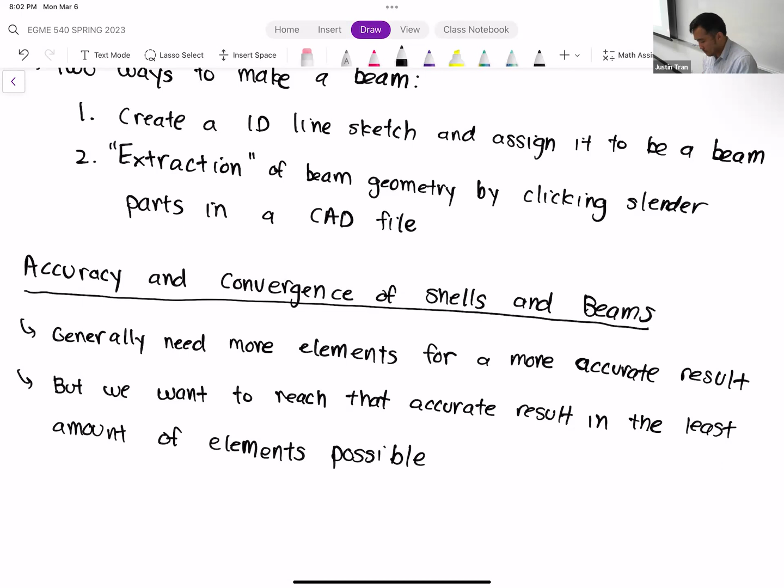It's like shopping for groceries. You want to get the most amount of food for the least amount of money. So when you talk about accuracy, it's not just a matter of getting an accurate result—it's how efficiently can you get there.

I've brought this up several times, but now is a good time to talk about it more specifically. The way we measure this is through a test called convergence. Convergence is basically a test of how quickly can you get to an accurate result, in terms of the number of elements.

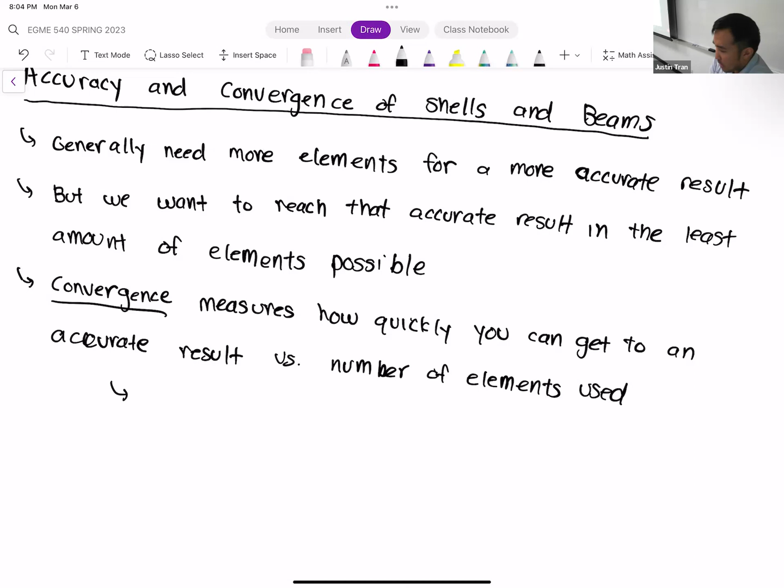The reason we call it convergence is that once you reach a certain point, accuracy isn't something you can keep getting infinitely better at. After a certain point, your simulation is accurate enough. So when you say your mesh is converged, you've reached a point where if you refine the mesh any further, you don't get any improvement in your solution.

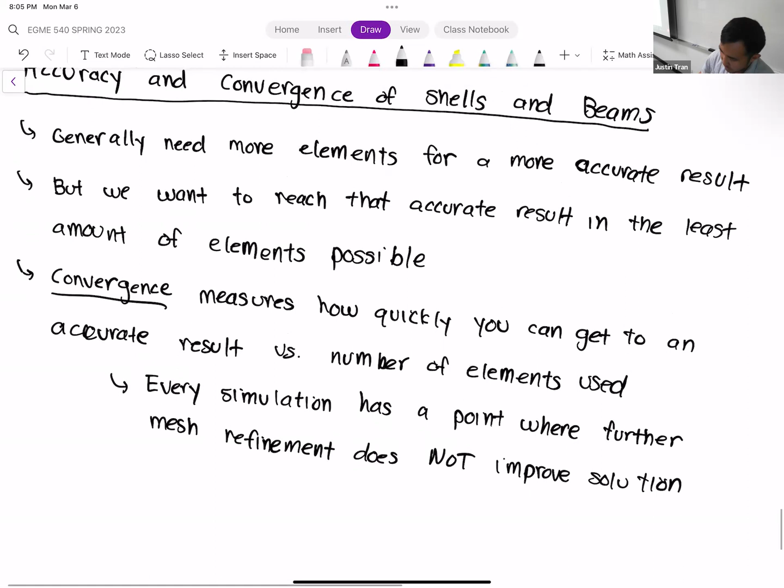So every simulation has that point. There comes a point where if you keep refining the element, you're not really going to be gaining much. You might get very minuscule changes, like 0.001 deformation of the result—that's always going to be there, that's numerical precision error. But realistically speaking, there's a point where it doesn't change.

And so to measure this, we can create something called a mesh convergence plot. So this is a mesh convergence plot. On the horizontal axis, we have the number of elements.

There's some variations on convergence plots. Some people like to put element size on the horizontal axis, but personally—this is just my own opinion, other people feel differently—I like to have the number of elements on the horizontal axis. That way you're converging to the right versus converging to the left, just because that's how I like to see things.

And on the vertical axis, we have the solution value. That could be something like a stress value or a deformation value, whatever you're interested in. Ideally it should be the thing that's hardest to converge—these are usually derived quantities like stress, but sometimes you're just interested in the deformation, and that's okay. When a mesh is converged, your convergence plot would look like this.

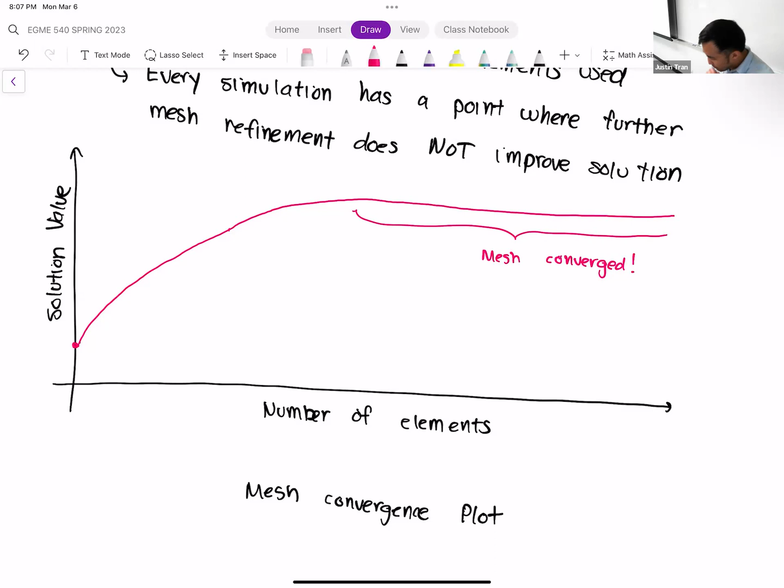So the ideal mesh would probably be somewhere around here—right at the beginning of the mesh convergence region. Because from there, you get as accurate a result as you can for the least amount of work, for the least amount of elements.

So why am I bringing this up? This may seem like it doesn't have much to do with shells and beams, but the reason I'm bringing this up is that shells and beams, for the situations where they're appropriate—when you have thin and slender geometries—reach convergence a lot faster than solid elements.

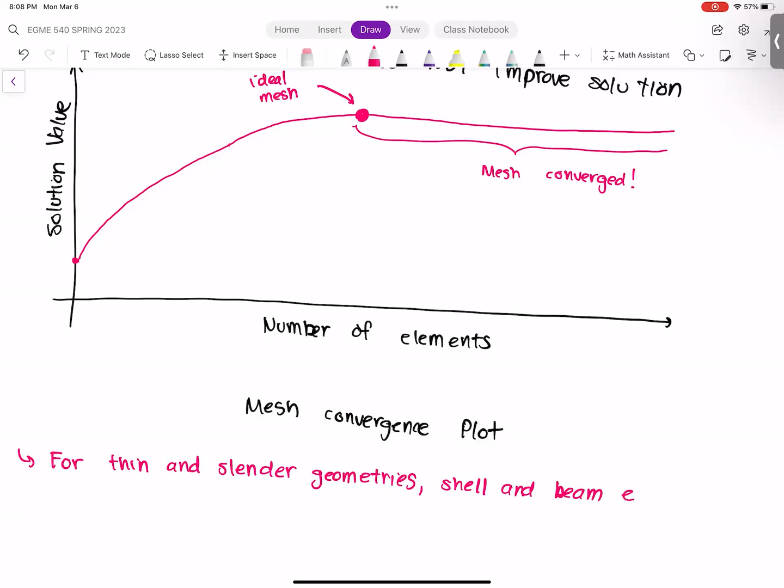Is that also to say that shell and beams help make the computation more affordable? Absolutely, yeah. Because when you use shell and beam elements, it's going to reduce your element count by a significant amount, and it's going to increase the accuracy of your simulation. So it's like a double punch of awesome. That sounds good.

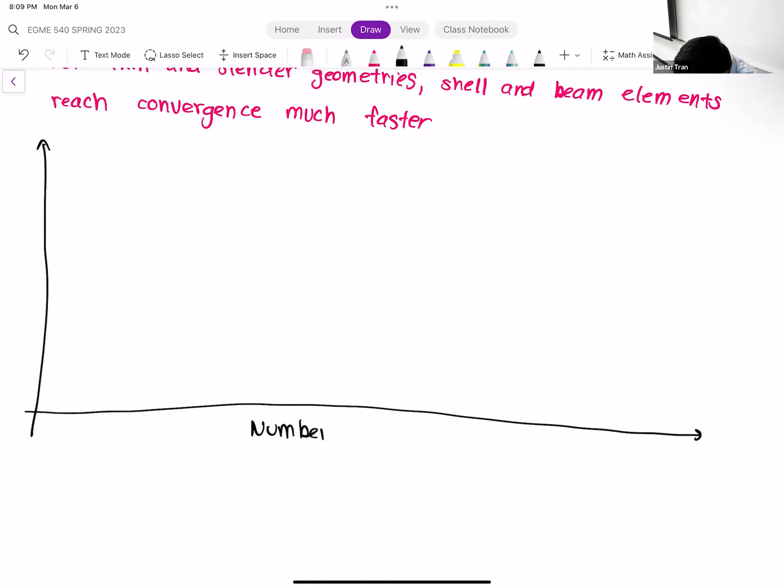And so if you look at the convergence plot, let's say we're running the exact same simulation, the exact same CAD geometry, the exact same boundary conditions. In one situation, we use just solid elements, maybe tetrahedrons or hexahedrons. In the other situation, we use shells and beams for all the thin and slender geometries. It would look something like this. Just like above, we have number of elements on the horizontal axis, and on the vertical axis, we have the solution value.

So for the solid elements, it might look something like this. Let's say this is solid elements. Of course, these are all approximate. I'm not drawing any numbers on these axes, so there's no magic number between these. I drew kind of an extended slope period to show that it takes a long time for solid elements to converge. If you compare that to shells and beams on the exact same geometry, it's probably going to look something like this. I should connect.

So this is shells and beams. Your ideal mesh for the shells and beams is down here, whereas your ideal mesh for the solid elements is probably somewhere out here. So for shells and beams, you reach convergence a lot faster. That means your simulation is going to be a lot cheaper. It's going to finish a lot faster. And in general, it's going to look a lot better. So this is kind of important.

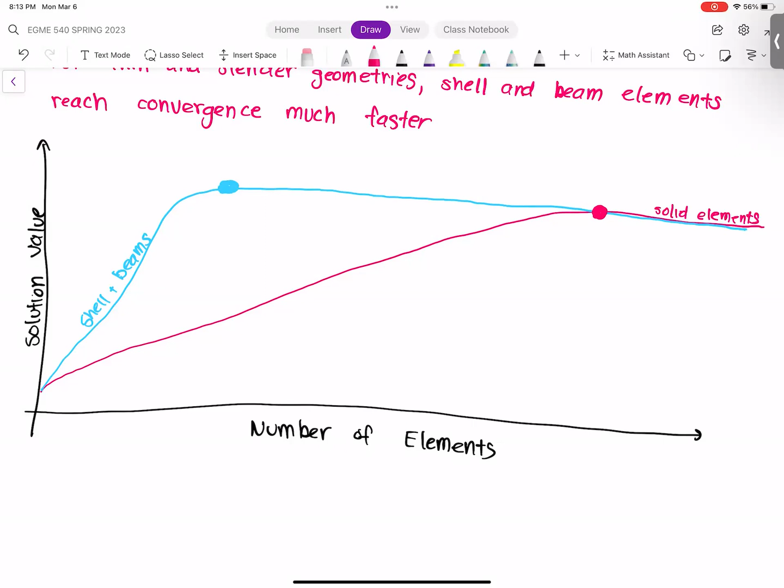Professor, I have a question. If we can't make it to the office hours you have set, would it be possible to schedule a 30-minute Zoom call on Thursday or Friday? Yeah, absolutely, just email me. I know those office hours aren't going to work for everyone, especially for you grad students since you're really busy. So just send me an email, and we can try to find a time that works for a Zoom call.

Thank you. Yeah, I started a new job and it's all the way in Palmdale. Oh, dang. Yeah, so I get off like at 4:30, and driving home I don't get home till like 6. So yeah, I've been really trying to, thank you, I appreciate it. Yeah, just email me, we can set up a time. Thank you.